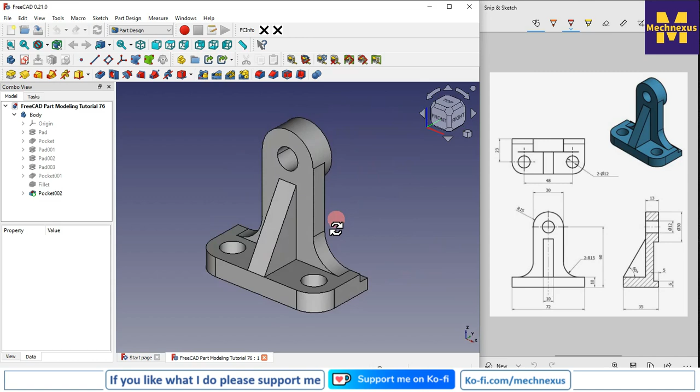So this is a very simple part which we will design with respect to the dimensions, and as you can see, I have already done it, and I will show you from scratch how you can do the same in FreeCAD. So I will close this file and create a new file.

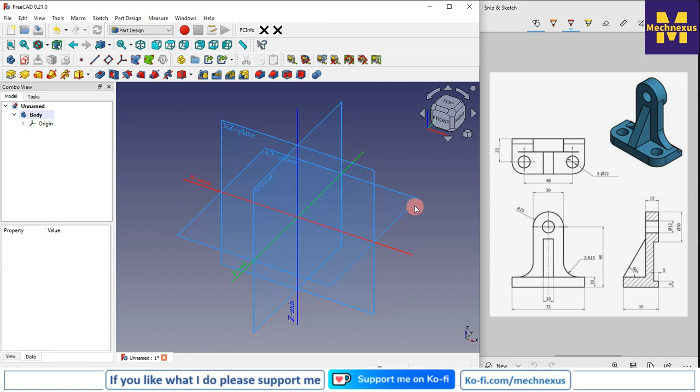So let's come back to our tutorial. And here I will insert my body, and I will turn on my origin plane, and we will create our first sketch on the top plane. So we will select the top plane and click on the sketch.

Now we will go to the model tab and turn off our origin, and we will create a simple rectangle, and we will give the dimensions. As we can see, this is 72 and the width is 35 if we add the radius. So we will make it symmetric. We will select this point and this middle point, and give the horizontal dimension of 72 and vertical dimension of 35.

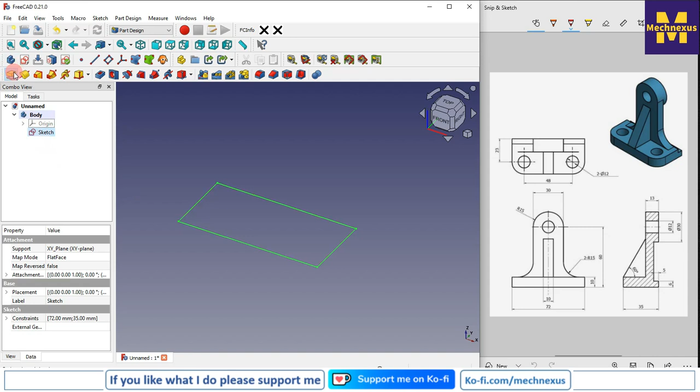Now we will go to the task tab, close the sketch, and now we will create the pad of 10 mm. Select the sketch, click on the pad and give 10 mm, and now we will remove the material here.

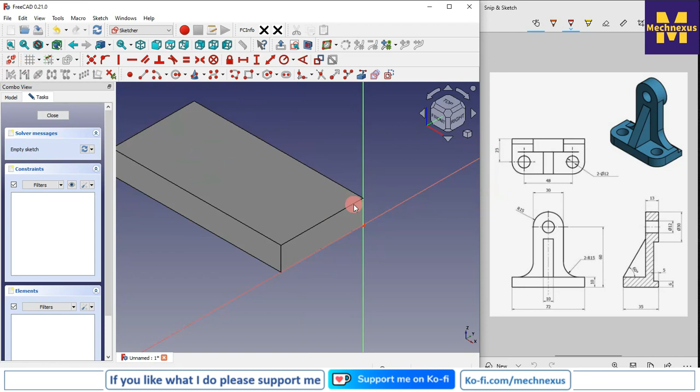So for this we will select the right face and click on the sketch, and now we will switch to the isometric, and here we will create a small rectangle. So we will switch to the right plane, click on the project geometry, project this and the bottom one, and now we will create a rectangle, and now we will give the dimensions.

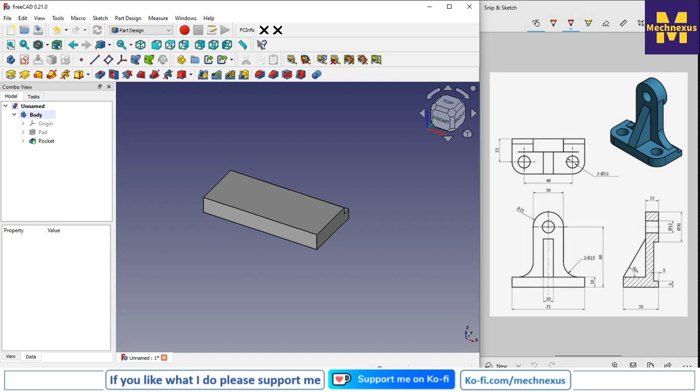So this one is 5 mm, which we can see here. So we will give the horizontal dimension of 5 mm, and vertical is 6 from this edge. So we will select this point and this point and give 6 mm, and we will close it. Click on the pocket, select through all, say OK, and now we have created this cut, and now we will create this profile on this face.

So we will select the face and click on the sketch, and this is the rear view. So we will make it normal, and the first thing we will do is project this geometry, and first we will create a circle, and this is of diameter 30. So we will select it and give it a diameter of 30 mm, and from the center it is 60 mm, which we can see here from the bottom edge.

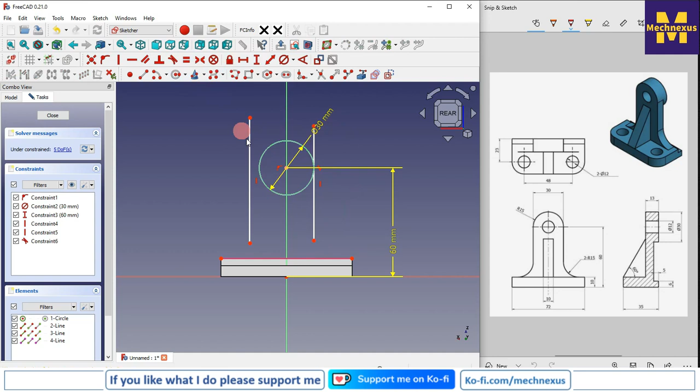So here we have our origin point, and we will select this and give the vertical dimension of 60, and now we will draw the two vertical lines at the two sides. So select the line tool, and add the tangency. Similarly add the tangency, and now select this point and this arc and give the constraint. Select this point and this one and give the constraint.

And now we will select a 3-point arc and create one arc, and we will add the tangency relation here. Add the tangent, similarly add the tangent, and from the bottom select this and add the tangent, and select this and add the tangent, and this and this radius are equal, so we will give the equal constraint, and this one is R15, so we will select it and give the radius 15 mm.

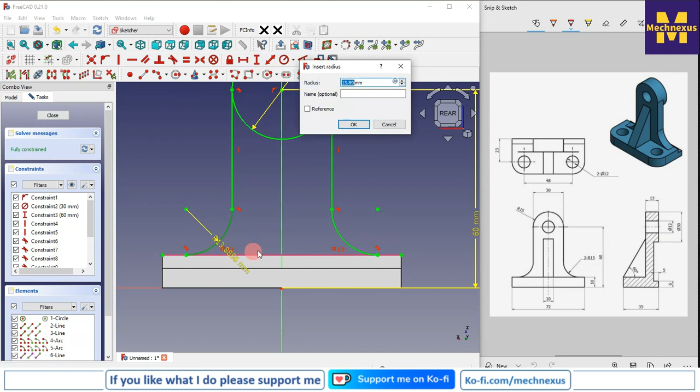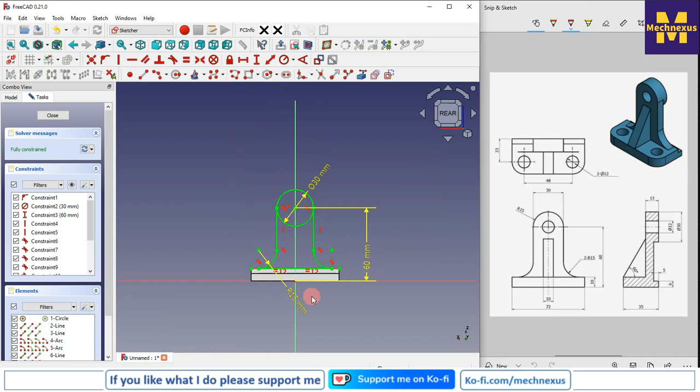And now we will select the line tool and close this profile. And now here one constraint is conflicting, so we will select it and delete it. So our sketch is fully constrained, so we will close it and we will give a pad of 8 mm, because the total is 13 and this is 5.

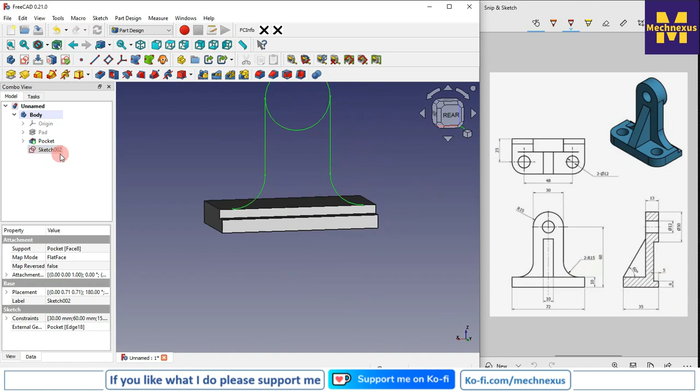And here one thing which we will do is to trim this geometry, so we will again go to the sketch and select the trim option and we will trim it. Now close it, click on the pad, click on reverse, give 8 mm

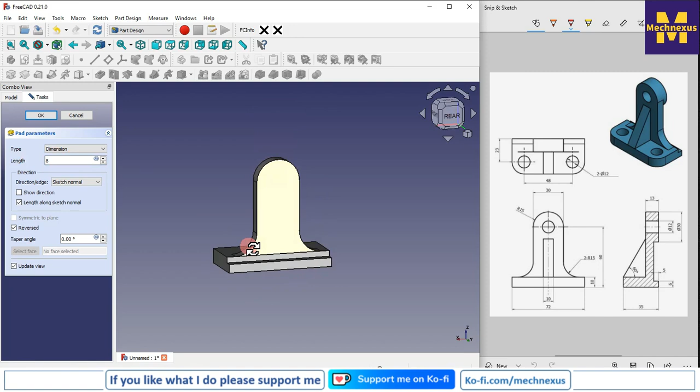and click on OK. Now you might be seeing a line here because this face and this face are not merged, so select the pad, go to the refine option and set it true. So you can see that now it has been removed and this is completely merged.

And now the next feature which we will do is to create this pad. So we will select this face and click on the sketch, and we will project this outer edge. So click on project geometry and click on the circle option and create a circle. Click on OK, and now create the pad of 5 mm.

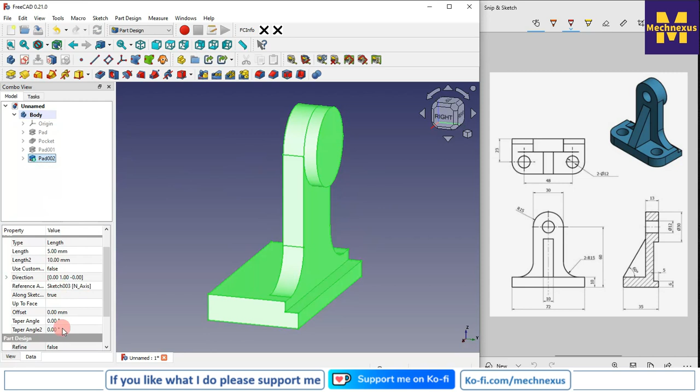So select the sketch, click on the pad and give 5 mm, click on OK. Now we will again use the refine tool, so go to refine and set it true.

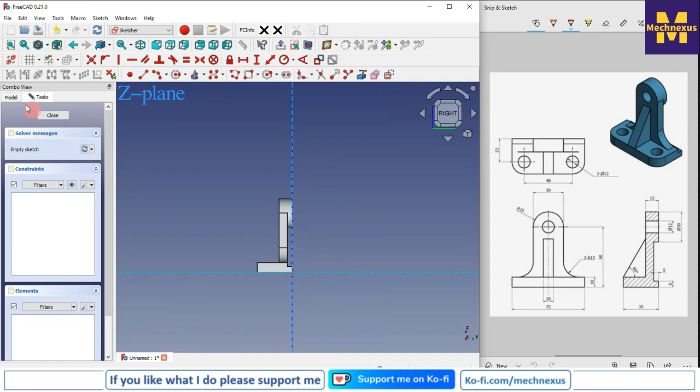And now the next thing which we will do, we will create this rib which we are seeing in the middle. So for this we will press the space bar on our origin plane, and we will select this mid plane YZ and click on the sketch, and we will again turn off our origin plane, and for better visibility we will switch to wireframe and we will project these edges.

And now I will select the line tool and create a line, create a triangle and close the profile. And here is an angle of 60 degrees, so we will select these two lines and create the angle of 60 degrees.

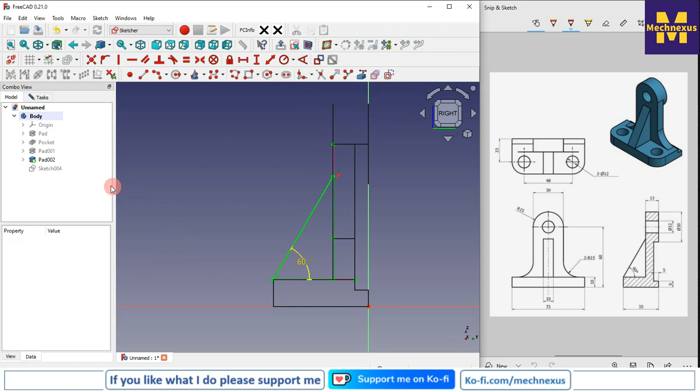Click on close, and from here switch to flat lines, and here the thickness is 10 mm, so we will click on the pad, and from here we will select symmetric to plane and click on OK. So we have created the rib, and now we will create this hole.

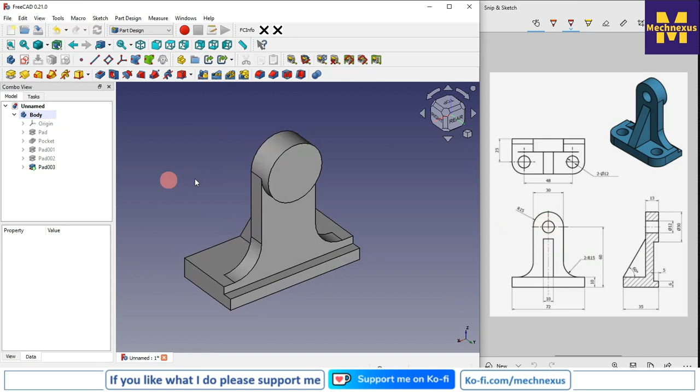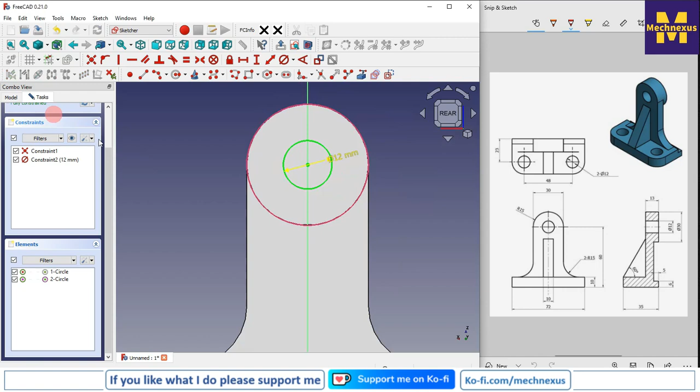So we will select this face and click on the sketch, click on project geometry, and this hole is of diameter 12. So we will create a circle and select the diameter option and give it 12. Now we will close it. So this is the hole.

You can use the hole tool or pocket tool. So let's do it with a hole. So here the diameter is 12, end condition is through all. Say OK.

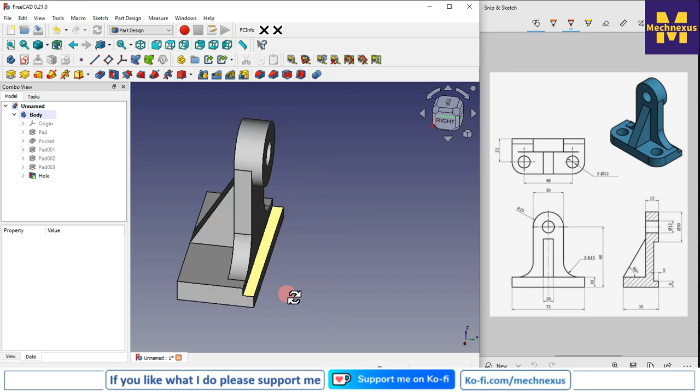Now the next thing which remains is to create a fillet of 12 mm, which we can see here. So we will select these two edges and click on the fillet and give here 12 mm, click on OK.

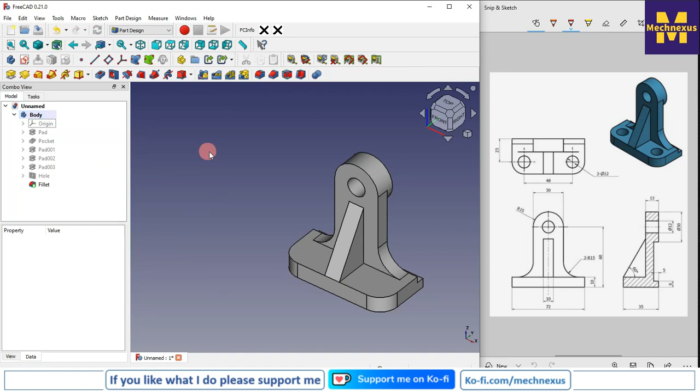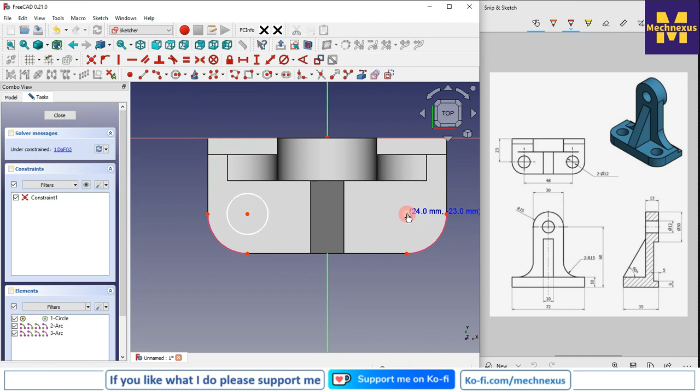Now we will create these two holes of diameter 12. So we will select the face and click on the sketch and we will project these two fillet edges. So click on project geometry and create a circle and give both an equal constraint and select the diameter and give it 12.

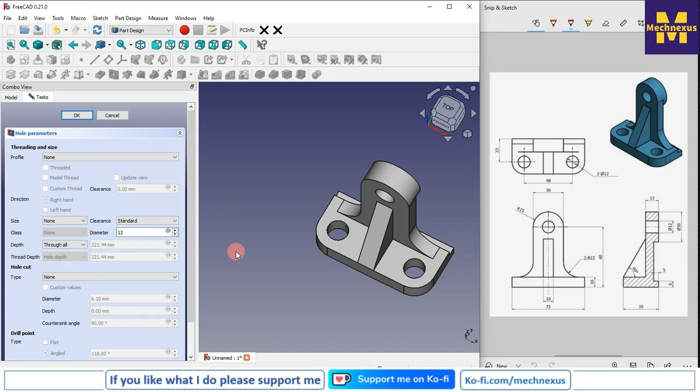Click on close. Now we will select the hole tool, and the diameter is 12 and we will set it through all. Click on OK.

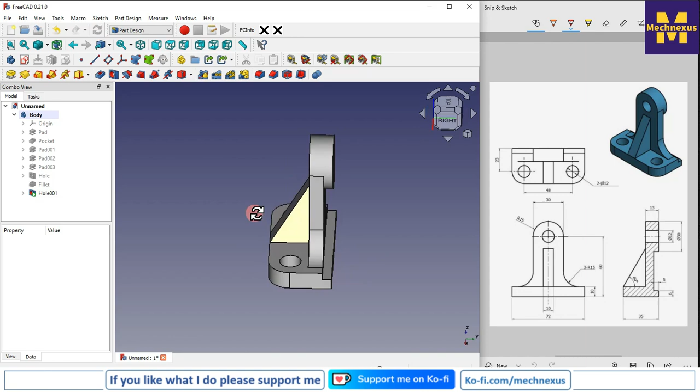Now you can see that we have successfully converted this 2D drawing into the 3D model, and of course this 3D view might be drawn in some other software, but you can see that FreeCAD is capable of doing the same, and it has equal modeling potential compared to other 3D software in the market. So this is all about this tutorial, how to use the Part Design workbench for part modeling in FreeCAD.